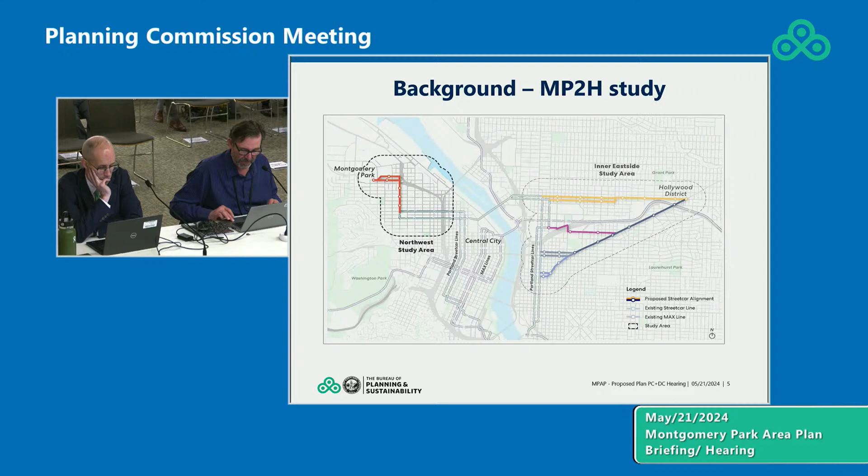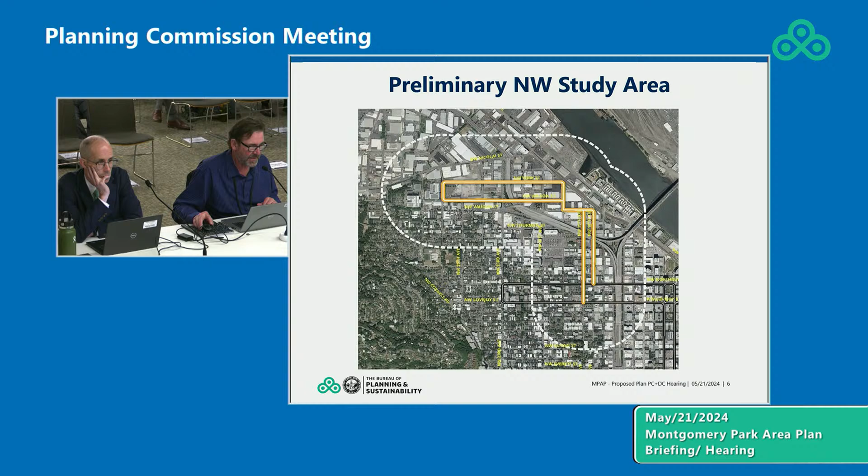The Montgomery Park to Hollywood study included a lot of high-level planning goals that centered around growth and resilience, expansion of housing and job opportunities, and urban form. I want to mention that an important aspect of the work was to engage underserved communities to advance equitable outcomes and engage those communities in doing so. We'll hear a little bit more about that as I tell you about the public involvement.

The plan is responsive and did consider a number of policy priorities and is guided by those policy considerations. They include the ones listed here on the page, but really center on investments in centers and coordinated land use and transportation investments, the need for industrial and employment lands in the city to support and provide middle-wage jobs, particularly those that don't require a four-year degree, the need for more housing, including affordable housing in high-opportunity locations, and again, an emphasis on equitable development outcomes and how to realize public benefits through the value created by public actions.

So why plan for this Northwest study area? As I mentioned, there were some opportunities. This Montgomery Park to Hollywood process emphasized work in Northwest because of the opportunity and potential presented by the large and, at this time, somewhat underutilized sites located in this high opportunity area near both the central city and the industrial jobs of Northwest Portland.

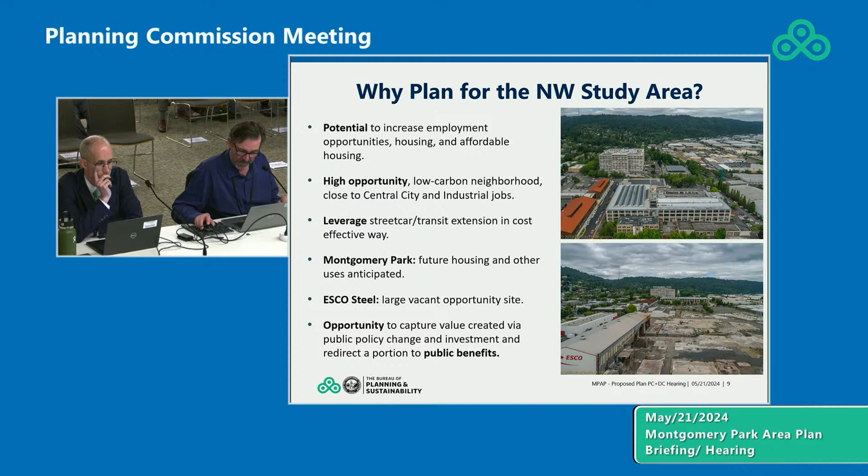We also worked with, on the east side, Hollywood Senior Center and Urban League, who partnered, as well as Micro Enterprise Solutions of Oregon, or MESO as they go by, and they again engaged their respective communities in the northeast area around Hollywood. I would note that all 4 of those organizations had seats on a project working group that Patricia mentioned earlier and participated in the study and the work that we're seeing tonight in Northwest via the working group.

We also engaged with many other neighborhood and other groups, including the Northwest District Association, Northwest Active Streets, and the Northwest Industrial Business Association. I mentioned the Northwest Project Working Group that met 7 times during the course of the project.

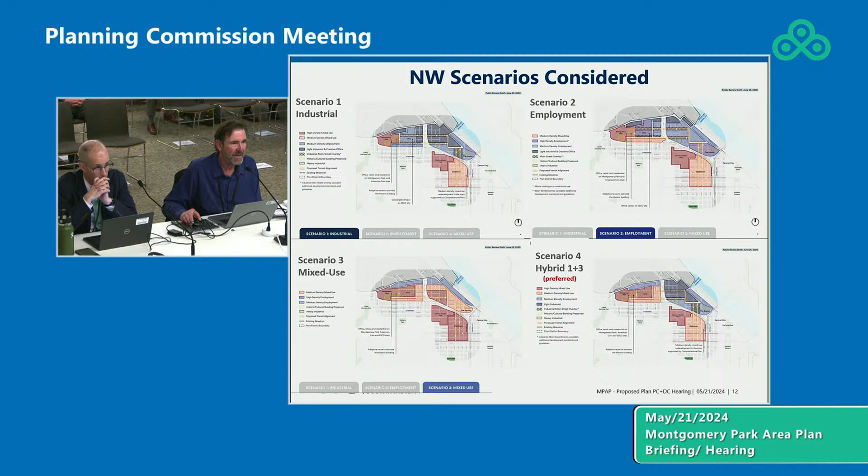It retains industrial uses east of Highway 30, in an area where the industrial uses are more built out and there is lower opportunity for change. And it proposes mixed use in the area west of Highway 30, shown in red and pink, where there is greater opportunity for change with the vacant ESCO site and the Montgomery Park site that has additional land capacity. That's resulted in this plan concept scenario here.

So what we're proposing is to create a new mixed-use neighborhood west of Highway 30, shown in red and circled in that red dashed line, served by an extension of Portland Streetcar. You can see the streetcar extending up 23rd, out Roosevelt Street, onto 26th, and back in a loop on Wilson Street. We would propose to change the land use designations in this area from industrial and employment designations to facilitate a broader mix of uses, and we'll tell you more about what use designations we're proposing in a moment.

This would create the potential for 2,000 or more new housing units, with 200 or more affordable units, but we're also proposing regulations and incentives and terms that would foster jobs in the area on a continued basis. So this will be a true mixed-use area, having both housing and job opportunities.

Important to note in the concept is that we retained an employment buffer along Northwest Nicolai Street, shown in blue there, that would not allow housing and would serve as a transition between the new mixed-use area shown in red and the existing industrial areas to the north of Nicolai, as well as the areas to the east.

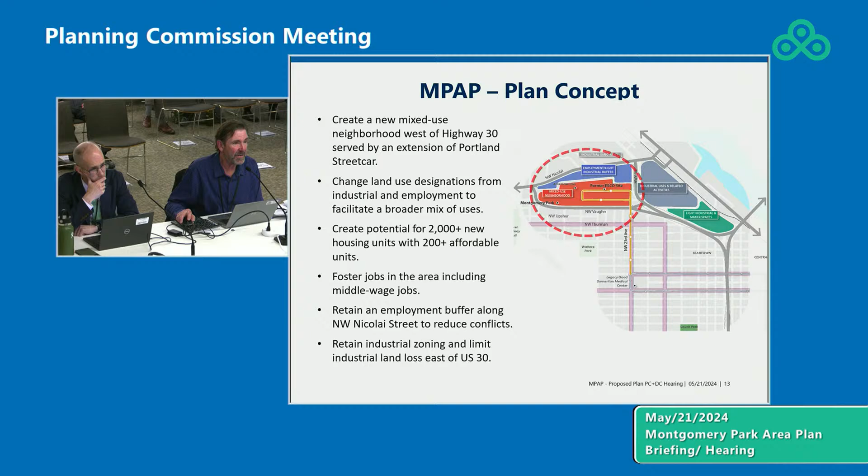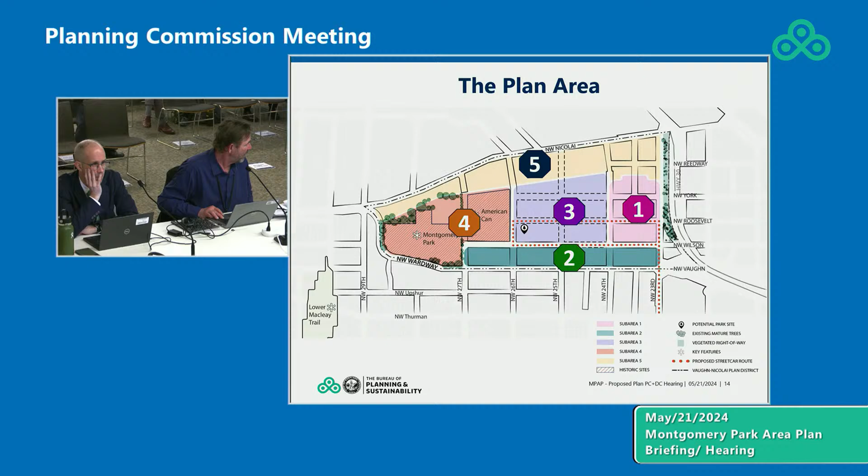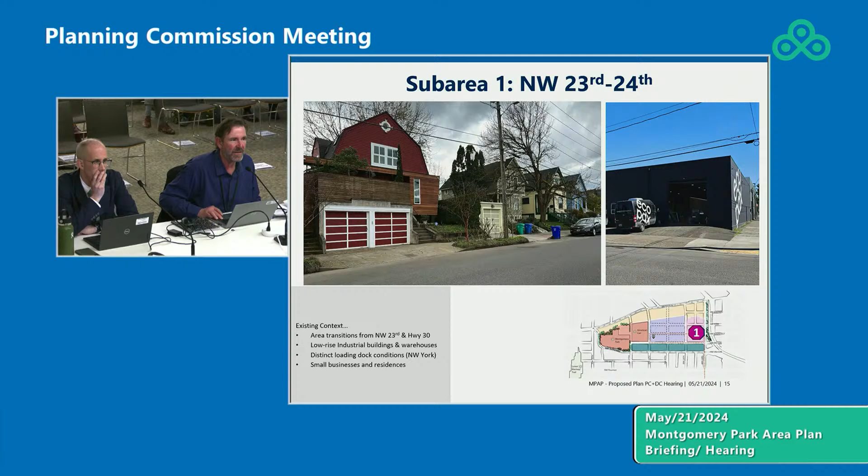So with that, I'm going to walk you through some photographs of the plan area to give you a flavor of it. We conceptualized it in 5 different sub-areas, and I'll walk you through those briefly—we'll hear more about those as we go. Starting with sub-area 1, between Northwest 23rd and 24th Avenues: it has a small lot and small block pattern generally, contains a lot of older low-rise industrial and employment uses, and about 8 single-family houses in the area, pictured here. Here are some of the employment uses located in that area.

Sub-area 2, which we consider the transition between this new area and the neighborhood to the south, lies between Northwest Vaughn and Wilson Street. It includes some traditional lower density employment and industrial uses, as well as commercial uses—there's a restaurant, some auto services, and a hotel in that area. This is the character of some of that area.

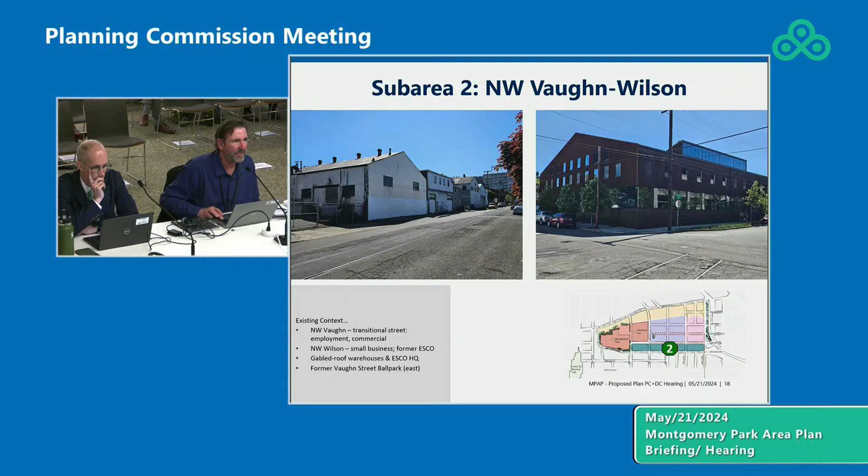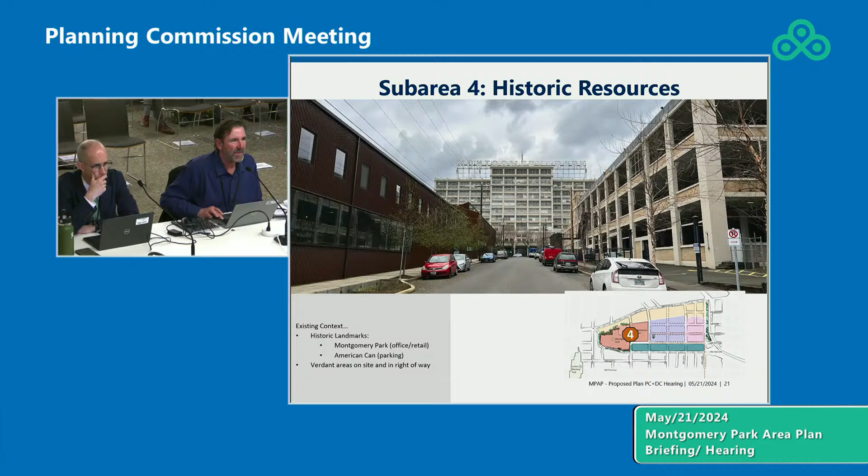This sub-area also includes some verdant and treed areas to the north that occur on a slope that act as a transition to employment areas to the north in the buffer.

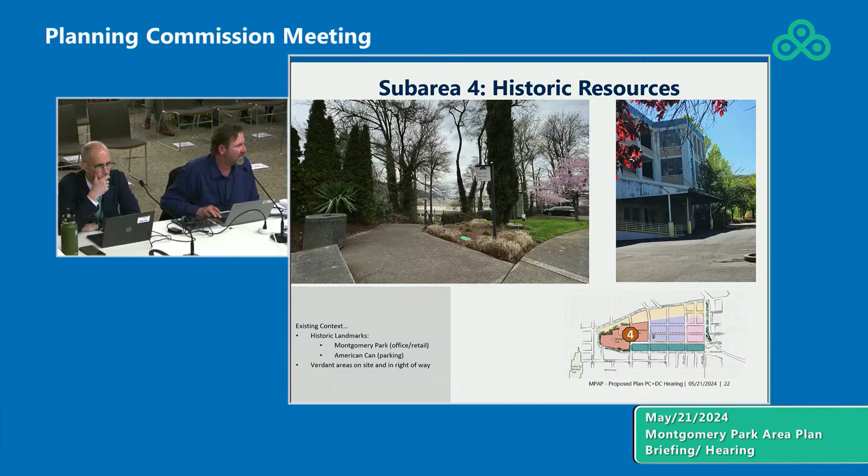And finally, the buffer area, sub-area 5, lies along Nikolai. It's shown in yellow on that map. It's in a mix of industrial and employment uses, typically large buildings, not a lot of windows, serving industrial and employment uses in that area.

So with that, I'm going to turn it over to Ryan. We'll talk a little bit more about the elements.

Thanks, Barry. So now that Barry has walked you through what is happening in the area today, here is an image of what we might expect to happen under the current regulations: larger floor-plate industrial and employment uses in lower scale buildings.

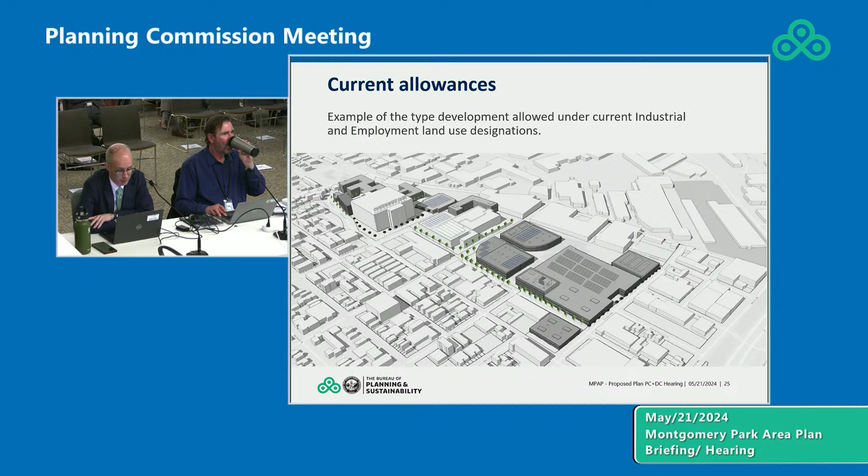This type of development is fine, it's good. It meets some of our employment goals. However...

Under the proposed plan, we would expect to see taller, denser development with a mix of uses, including residential, office, and employment uses, with open space and active transportation infrastructure, all served by a streetcar extension. Such development, we believe, would contribute to a wider array of comprehensive planning goals and policies.

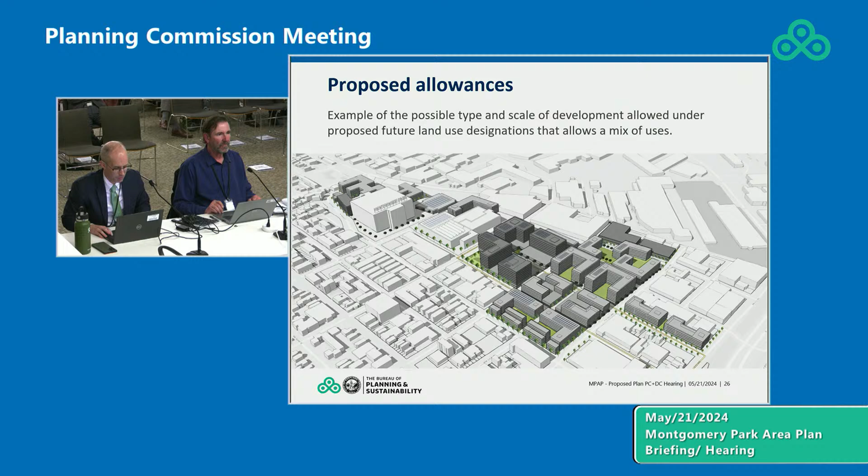Before we jump into the objectives and approaches, I want to discuss the racial equity analysis and equitable development report that were done as part of the planning for this area. I believe they're all in the appendix, right?

Yep. The reports found that the Northwest Study Area, the area surrounding the Montgomery Park area plan, is a high opportunity area, and that the relative risk of displacement in the area is lower than the city as a whole.

The reports recommended a value capture strategy to support equitable development, and also noted that the strong housing demand in the area means that development is more likely to occur, so we're more likely to meet our goals.

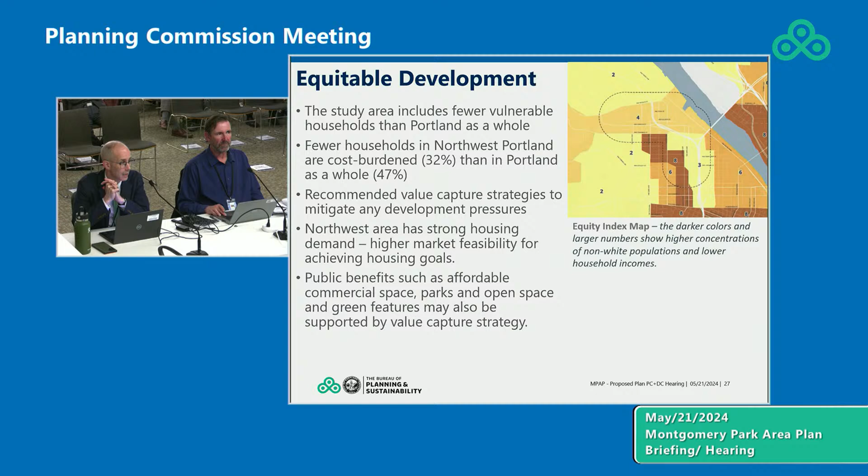The Montgomery Park area plan, this is a high opportunity area, as I said, with a plan to improve the transportation network and extend transit.

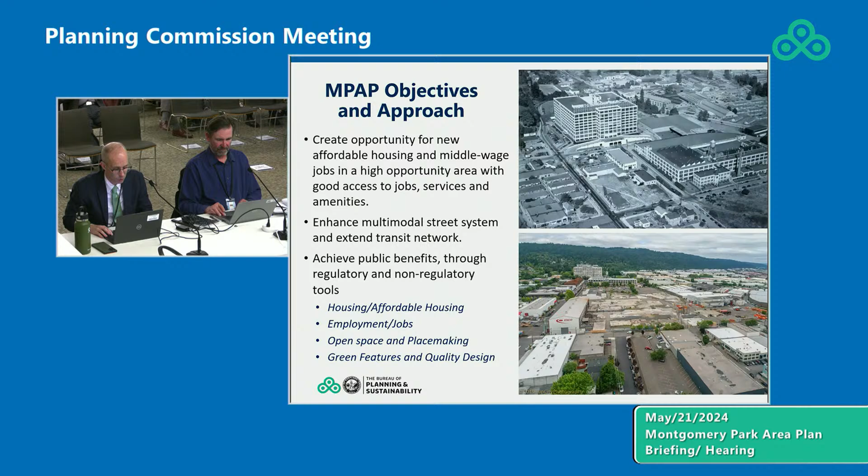The land use objectives of the Montgomery Park area plan are to advance the city's housing goals, specifically regarding affordable housing, to advance the city's employment and access to opportunity goals, to create open space or park along with placemaking elements, and to advance the city's environmental goals, all while achieving quality design.

So, we're not asking for too much.

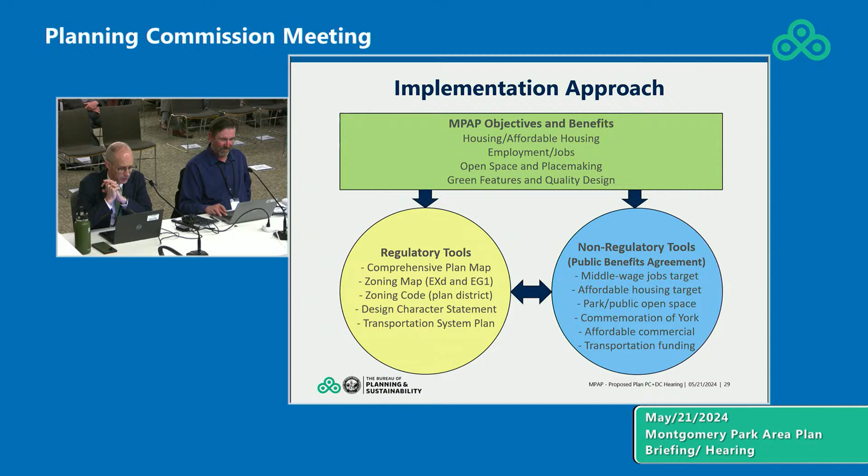The approach consists of two toolboxes: a suite of regulatory tools, shown in yellow, and a public benefits agreement, shown in blue. These tools are specifically designed to work together to achieve our equity and environmental goals.

First, I'm going to talk a little bit about housing, but I also want to note these slides are not intended for you to read in great detail. They will be available to the commission so you can go back and look at them.

But the objectives are there, and the table is intended to illustrate the way that the zoning code would work with the public benefits agreement.

I want to remind the commissions that the citywide inclusionary housing program works with the market to provide income-restricted housing where it would not otherwise occur. It is a carefully calibrated program that is just one way to produce affordable income-restricted units.

In Montgomery Park, the proposal would leverage this program to create upfront 200 units of affordable income-restricted housing. We want to deliver that benefit as soon as possible.

The zoning code would complement the public benefits agreement by only allowing the higher floor area if 15% of the dwelling units are affordable. So to unlock a higher amount, a bigger building essentially, they'd have to provide more affordable units.

Likewise, for jobs and employment uses, the zoning code would deploy a mix of requirements and incentives to ensure that the agreement's pledge of 800 middle wage jobs is achieved.

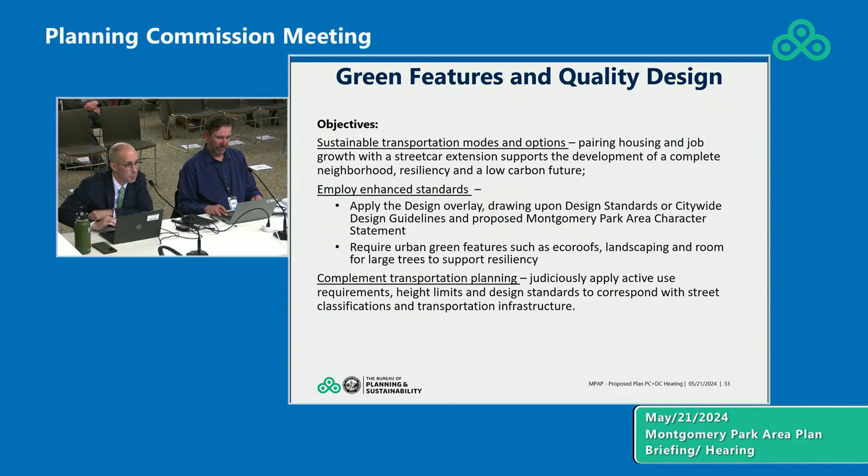On the regulatory tools, I'll give you a little roadmap to what's ahead. To dive further into the details, Cassie Ballou from the Urban Design Studio will talk about the urban design framework and character statement. Barry Manning will come back to discuss the regulatory changes, and Sean Canny from PBOT will walk you through the details on transportation.

There you go, Cassie? Thank you. I think my mic—is it on?

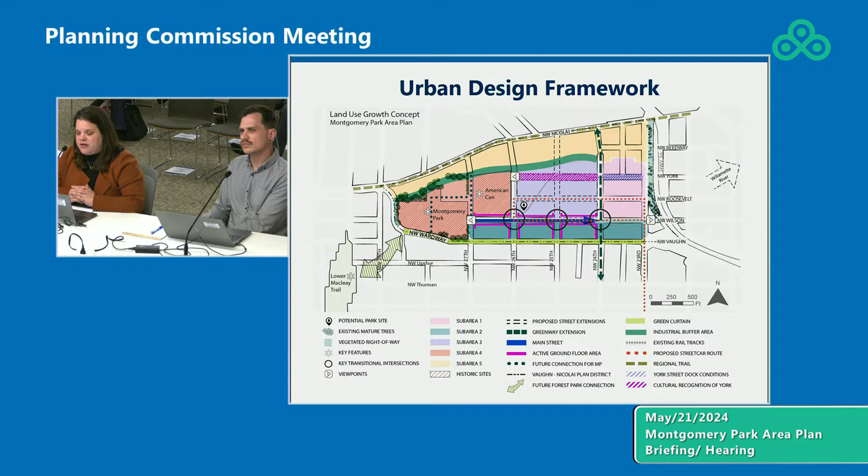Yes, okay, thanks Ryan. As you heard, the plan is home to a rich industrial and cultural history with a diverse mix of urban forms, block and lot patterns, building typologies and uses, as well as two prominent historic landmarks. The plan area's context is distinct enough that we've developed a series of sub-areas, as you heard from Barry, with concepts to build and support an urban design framework.

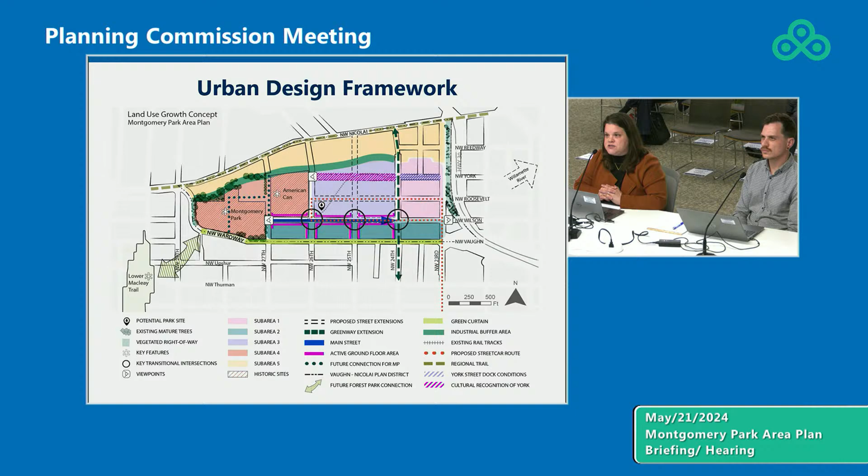This framework, illustrated in a land use growth concept diagram above, underscores how the plan's regulatory tools and policies will support the development of the entire district and address each area's unique context. This includes highlighting a new active Main Street on Northwest Wilson, and the location of some of the area's unique vistas and future connections to Forest Park. Through this, the project plan hopes to shift the conversation and change the vision for this area.

Next slide. This vision includes a few physical elements shown on this bird's eye view on screen, which illustrates a possible 20-year build-out of the planned district, including a redeveloped, active, and fully connected Northwest Wilson Street with access to newly created, publicly accessible open spaces and a new park, and development utilizing climate-responsive designs such as eco-roofs and solar panels.

The commemoration of York on Northwest York Street, reinforcement of the connection to Forest Park to create a new green curtain, replacing the former steel curtain, and the utilization of landscaping, setbacks, and careful building orientation to help offset potential impacts in this new mixed-use district.

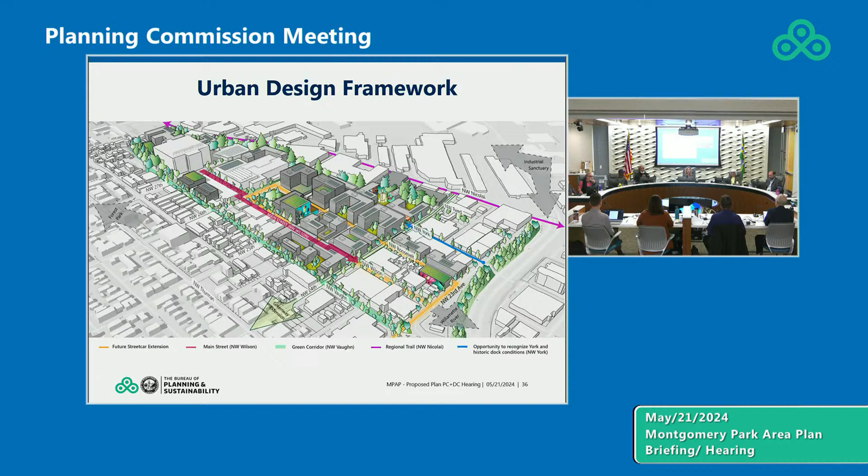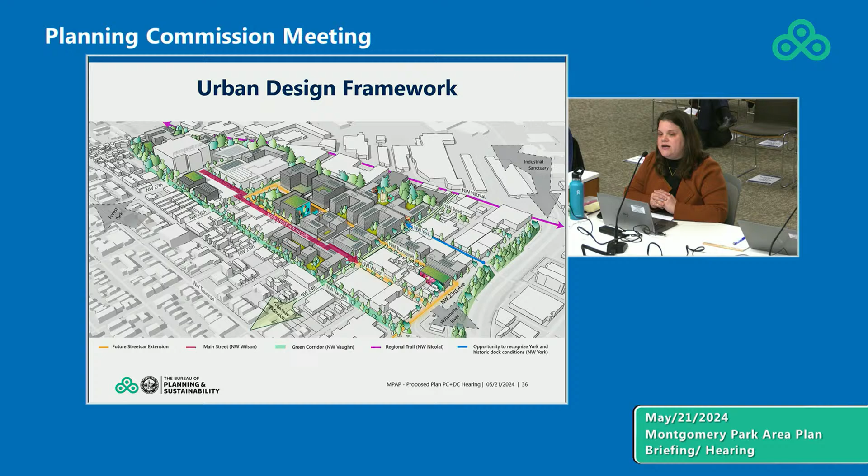The plan also includes the expansion of the design overlay, as you heard Ryan mention, to ensure that growth in the center aligns with the goals and policies set out in our 2035 comprehensive plan. As part of this expansion, the area will also receive a character statement to guide design reviews in developing the area as the community has envisioned.

Next slide. So within the plan area, the character statement will apply to the sub-areas that have the design overlay, indicated in the image in blue shade. Of those sub-areas, 1, 2, and 3 will most heavily use the character statement for projects that go through design review.

It will only apply to a small portion of sub-area 4, in areas outside the historic landmark boundaries, which are shown in pink. And although the statement will not apply to development within sub-area 5, the plan includes guidance to help mitigate impacts from this employment buffer, which still has some light industrial uses.

Final recommendations on the application and location of the design overlay will be made as part of the larger plan recommendations by the Planning Commission to City Council. However, the Design Commission will also provide their recommendation on the application of the design overlay to the Planning Commission during this process, and we can go over more of that later. Next slide.

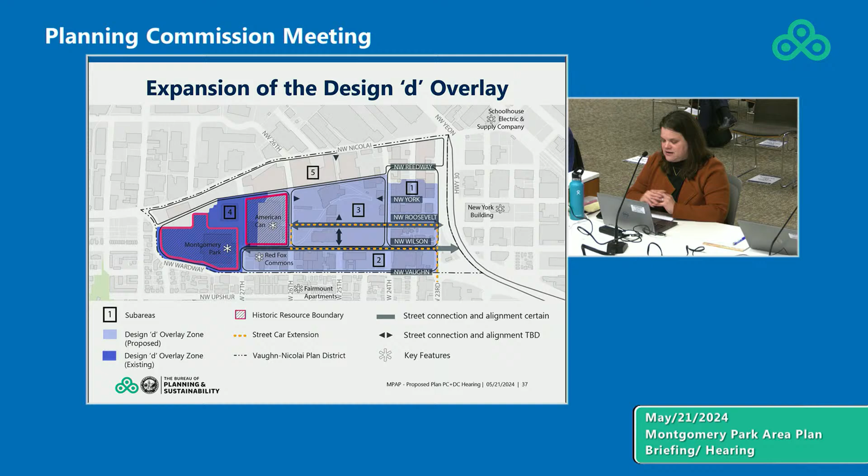The character statements are a new tool, and if adopted, this will be the third one in the city of Portland. It's a long-range tool intended to guide the development and inform the character of a place over a period of many years. Character statements apply in our centers and corridors, which have the design overlay zone.

The statements are developed in partnership with an area's local community through several points of outreach. For this one, that included the design workshop and open house in June of 2023 that Barry mentioned, a public survey in November of 2023, and a BIPOC design focus group in February of this year. Finally, the statements are adopted through a legislative process like this one, with a recommendation from the Portland Design Commission to City Council.

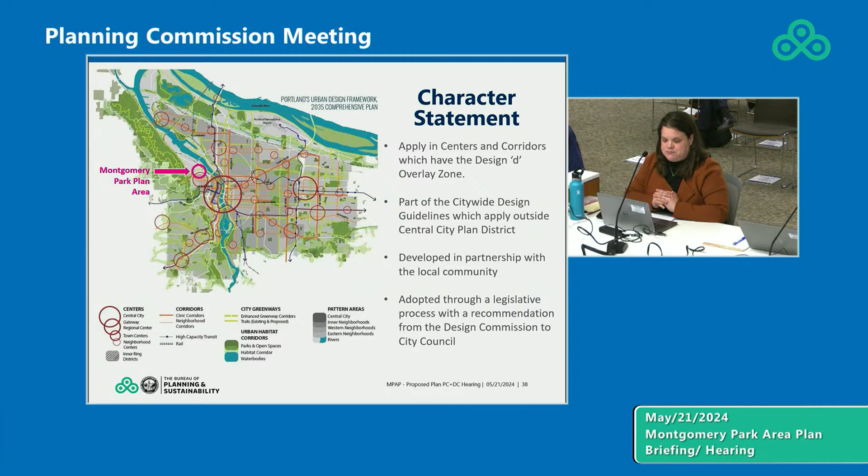Each character statement is limited to 2 pages and provides a background, a diagrammatic map, and guidance around 3 themes: community, architecture and urban design, and natural and scenic resources.

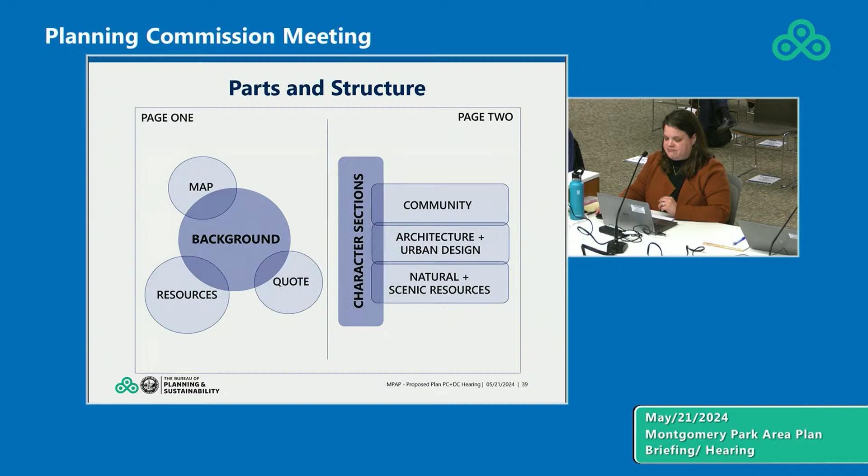The statement covers a lot of ground, but much of the guidance is centered around 3 primary issues: referencing, reusing, and preserving the area's industrial heritage; acknowledging the contributions made by previously displaced communities of color, primarily Black, Chinese, and Indigenous communities; and acknowledging and restoring, where possible, the area's natural environment and resources.

Staff also looked for opportunities to strengthen guidance within the character statement through the plan's proposed regulations and policies. This includes additional support for maintaining a landscaped buffer and setbacks at the northern border of Sub-Area 5, enforcing an active Main Street on Northwest Wilson, and incentives for more public open spaces and a new park.

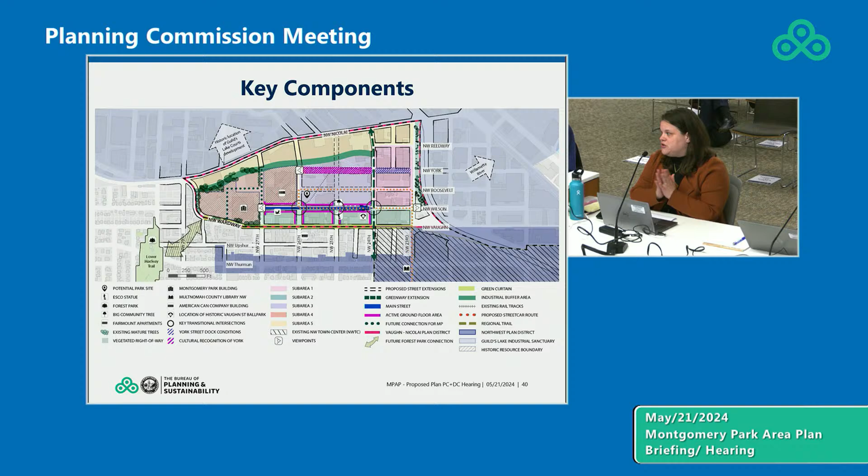And with that, I'm going to turn it over to Barry to talk more about the regulatory policies. Great, thanks, Cassie.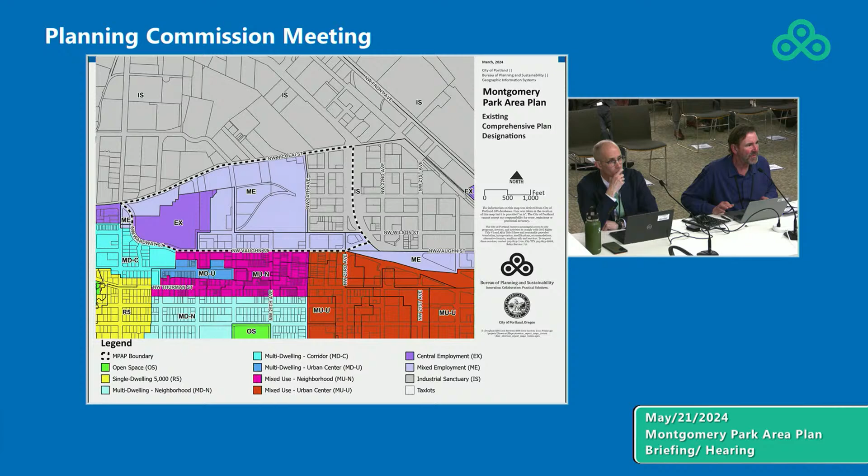I'm going to walk you through changes we're proposing to the comprehensive plan maps and comprehensive plan, as well as the zoning maps and some zoning code highlights we're using to implement the Montgomery Park area plan. What you see pictured now is the current comprehensive plan map, and the comprehensive plan, as a reminder, denotes the long-range vision for development in the area.

Currently that vision is a combination of central employment shown in the bright purple, with the EX designation. I wish I had a pointer. Boy, where did those go? But if I had a pointer, I'd be pointing at the EX area in dark purple. That's the Montgomery Park site. To the right of that is the lighter purple ME labeled area.

That is the area Patricia referenced early on in this presentation that was designated in the 2035 comp plan as mixed employment, the area where we're expected to see a change and transition from heavier industrial uses to offices and more intense uses. To the right of that, you see the small block pattern between 23rd and 24th Avenues that is currently zoned General Industrial 1.

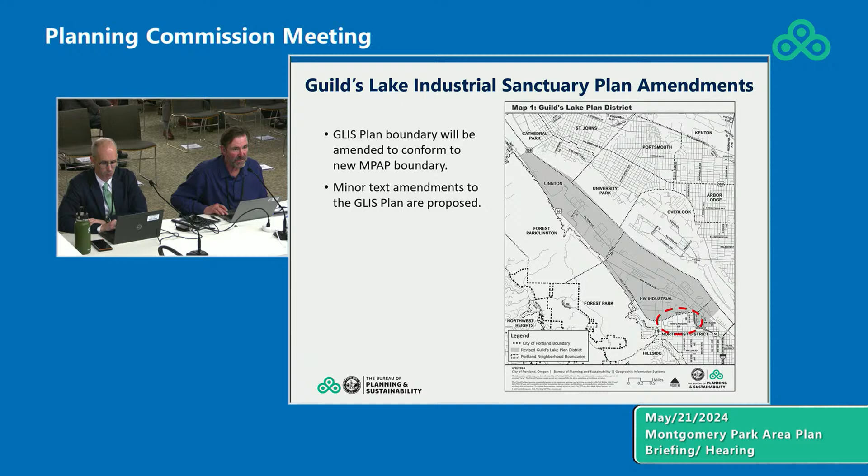We are proposing, as I mentioned earlier, to reconcile a couple of existing area plans. The Guild's Lake Industrial Sanctuary Plan overlaps in this area, and we're proposing to amend the boundary of that plan to remove the Montgomery Park Plan area from the Guild's Lake Industrial Sanctuary Plan area. We also are proposing some minor text amendments that are in Volume 4.

Similarly, to the south is the Northwest District Plan, which also has a slight overlap with this area. We're proposing again to amend the Northwest District Plan maps and some minor text amendments to remove the Montgomery Park Area Plan area from the Northwest District Plan, to reconcile them so that there's not confusion about which set of regulations or rules apply in these areas.

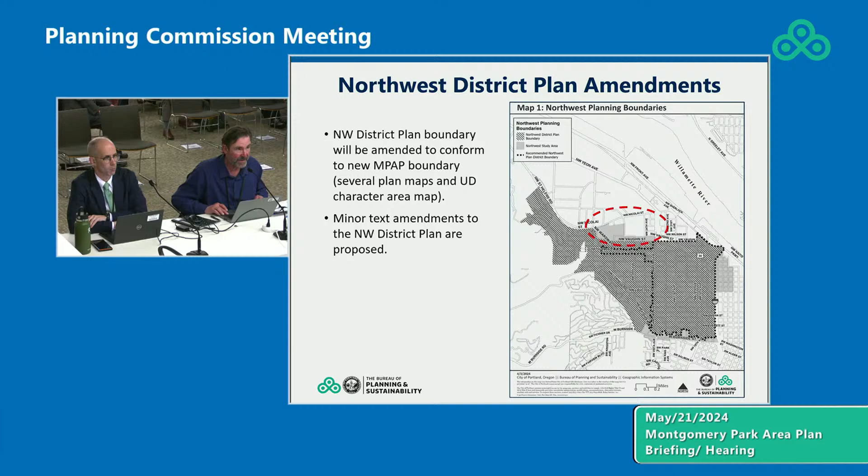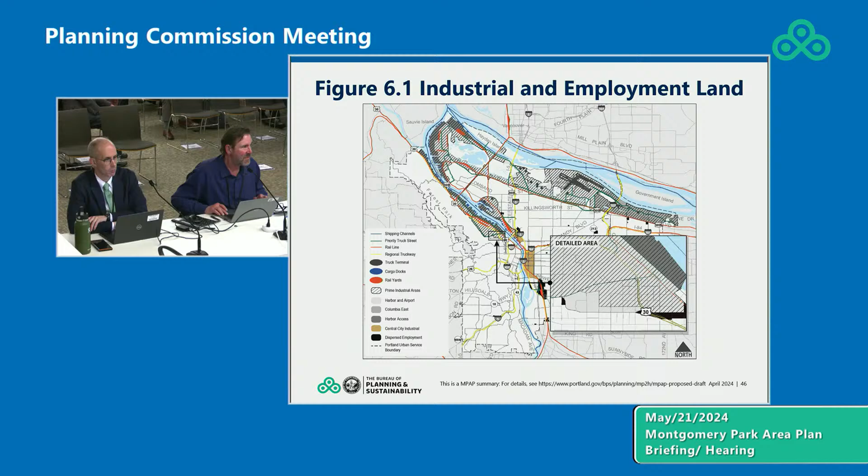This is the existing figure 6.1, which shows industrial and employment lands throughout the city, and the inset map shows the application of the designations in this particular area. It's a combination of prime industrial overlay areas and some employment overlays, and as part of the proposal, we are suggesting that we remove the prime industrial overlay and the employment overlay, although some of the areas may still qualify as employment areas that would belong on this map.

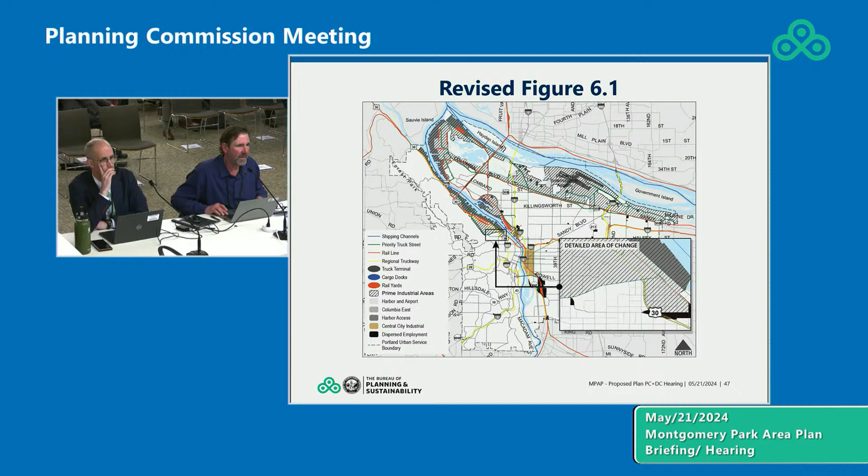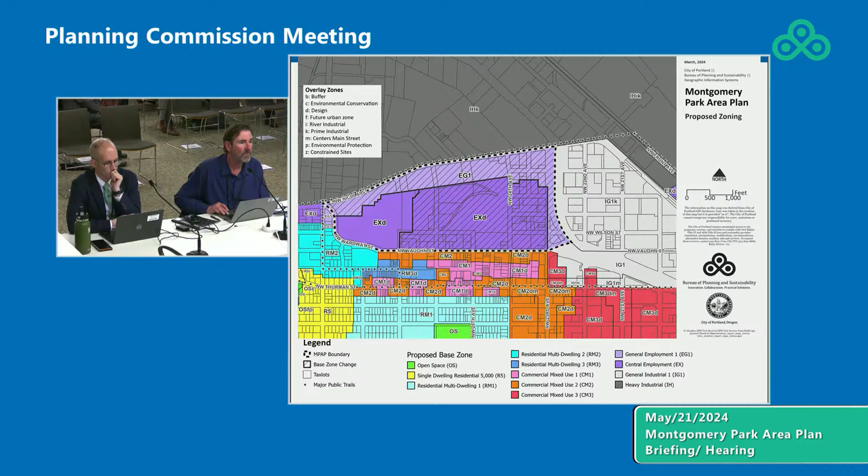Along with the zoning map changes, we're proposing, as I mentioned earlier, a new plan district tool in the zoning code that would further regulate development in order to evoke transit-oriented development in this area and the intensity that Ryan showed you and Cassie showed you in some of those diagrams.

Some of the key features of this new plan district include bonuses for height and floor area, non-residential floor area or space requirements, active use areas on the main street, affordable commercial space, urban green features, and others. We can talk more in detail about those as we move forward.

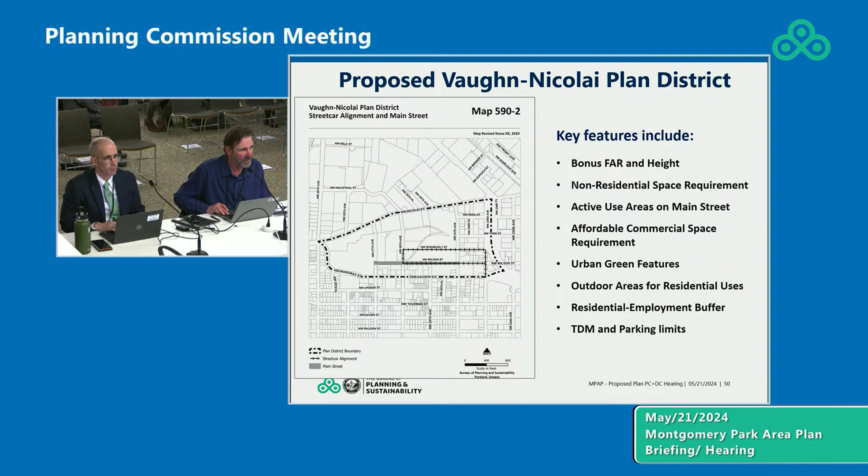The floor area and height bonuses are related to inclusionary housing, evoking additional affordable housing or a higher percentage of affordable units, and employment opportunity. I would note one more thing, a detail we can talk about later, that in areas C and D, those floor area ratios are linked to the public benefits agreement fairly directly in the provision of early affordable housing units.

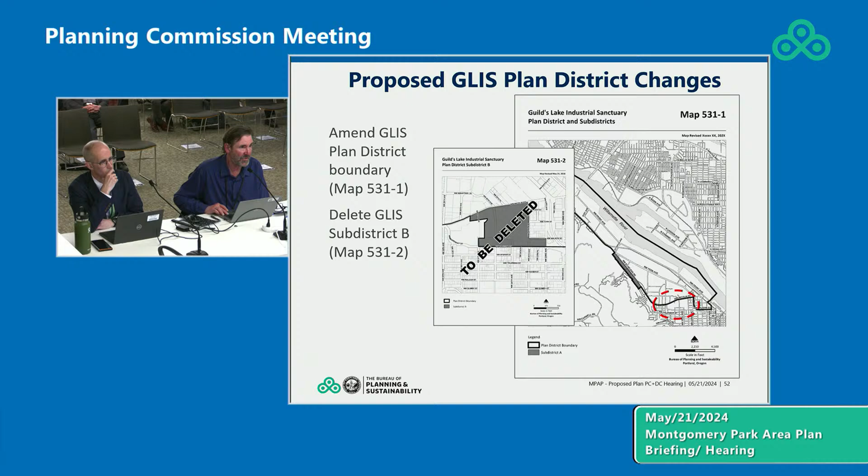We are proposing, similar to the plan amendments, some amendments to the plan districts. We're proposing to remove this area from the Guild's Lake Industrial Sanctuary Plan District. And similarly in Northwest, which has a plan district, we're proposing to apply streetcar-oriented development regulations along Northwest 23rd, where this new streetcar extension would occur. That complements the existing regulations that apply in the dashed area on Northrup and Lovejoy.

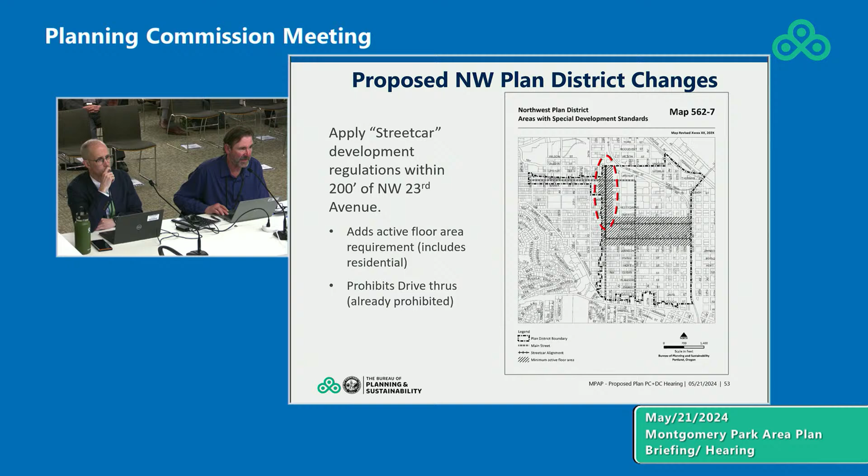Good evening, Commissioners. My name is Sean Canny. I'm a transportation planner at the Portland Bureau of Transportation. Also present this evening are Mauricio Leclerc, supervising planner of the area and project planning team at PBOT, and Dan Bower, who is executive director of Portland Streetcar.

The proposed draft of the Montgomery Park Area Transportation Plan, which is Volume 3 of the Montgomery Park Area Plan, includes recommendations for multimodal transportation projects centered around the proposed streetcar extension to Montgomery Park, as well as based on adopted plans, existing policy, public engagement, and analysis. It also recommends policy updates to the Transportation System Plan, or TSP, and overviews recommended implementation strategies.

In addition to the community engagement described earlier, PBOT conducted another round of community engagement, mostly during 2023, focused on the proposed streetcar extension. We worked to reintroduce the project and get input on the community's needs and priorities, as well as to gather additional feedback on other proposals in the plan. We focused much of our canvassing and intercept surveys near existing regulated affordable housing near streetcar in Northwest Portland, as well as at existing transit stops near the proposed alignment.

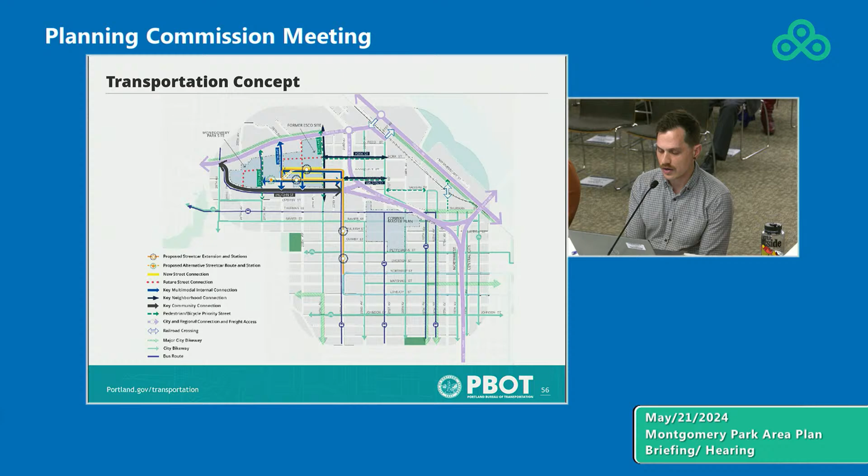The recommendations in the plan are organized around connections. This map represents the transportation concept for the area, which considers multimodal connections at various scales.

More specifically, the plan includes project recommendations at 3 different scales: those internal to the Montgomery Park area itself, those that stitch the area together with the rest of the Northwest District neighborhood, and those that facilitate movement to and from the broader citywide and regional transportation network. The centerpiece recommended project, referred to in the plan as the Big Move, is a proposed streetcar extension, as it improves connections at all 3 of those scales.

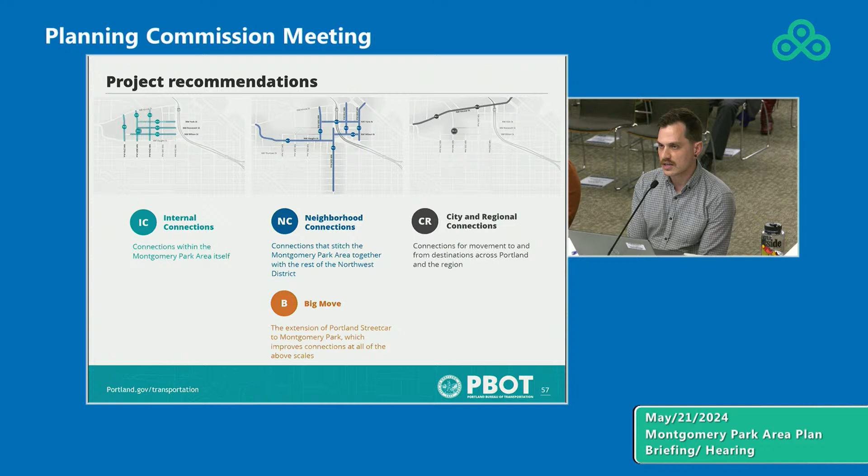The proposed streetcar extension itself connects the existing streetcar system to Montgomery Park. It is planned to be 100% off-wire using proven hybrid battery technology, significantly reducing construction and ongoing maintenance costs and minimizing impacts in the project area. I'll also note that Portland Streetcar's original fleet of vehicles are about 25 years old and reaching their end of useful life, and procurement of up to 15 new off-wire capable streetcars is already planned due to this need.

The project would also include new multimodal streets, including extensions of Northwest Roosevelt Street, Northwest Wilson Street, and Northwest 25th Avenue—shown on this map as the green rectangles—as well as complete rehabilitation of Northwest 23rd Avenue from Northwest Lovejoy to Northwest Vaughn, including stormwater, utility, and accessibility upgrades. The community has called for improvements to 23rd Avenue for years.

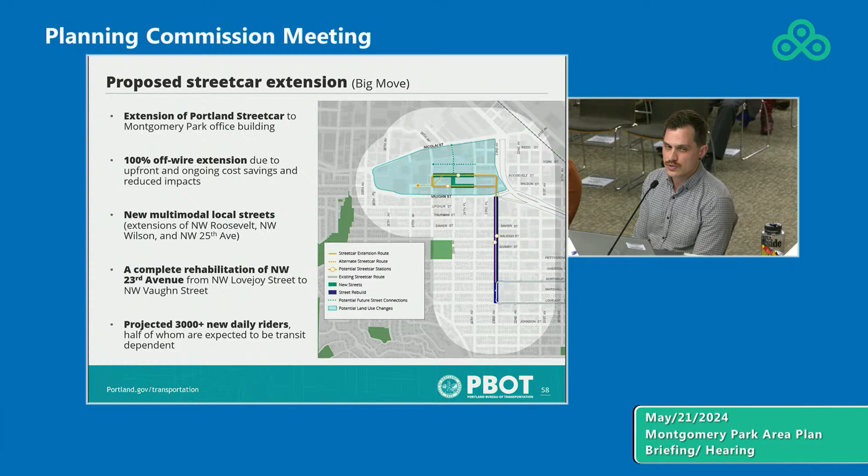The extension is projected to support 3,000 or more new daily riders, half of whom are expected to be transit dependent. To get more specific, the preferred transit alternative is a 0.65 one-way route mile extension of

the existing Portland Streetcar North-South, or NS line, from its existing terminus at Northwest 23rd Avenue and Northwest Northrup Street, along Northwest 23rd Avenue to a parallel one-way couplet with westbound movement on Northwest Roosevelt Street and eastbound movement on Northwest Wilson Street.

Station locations have also been identified, though they would be finalized as part of the planned upcoming formal project development process, which will include more community engagement.

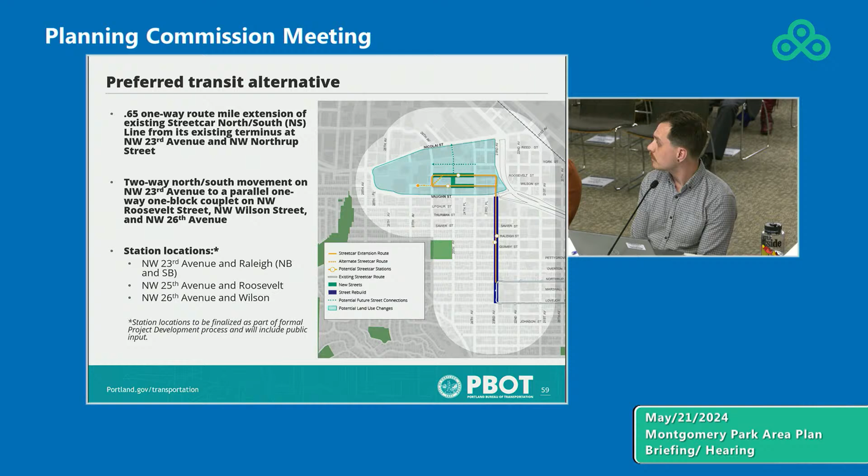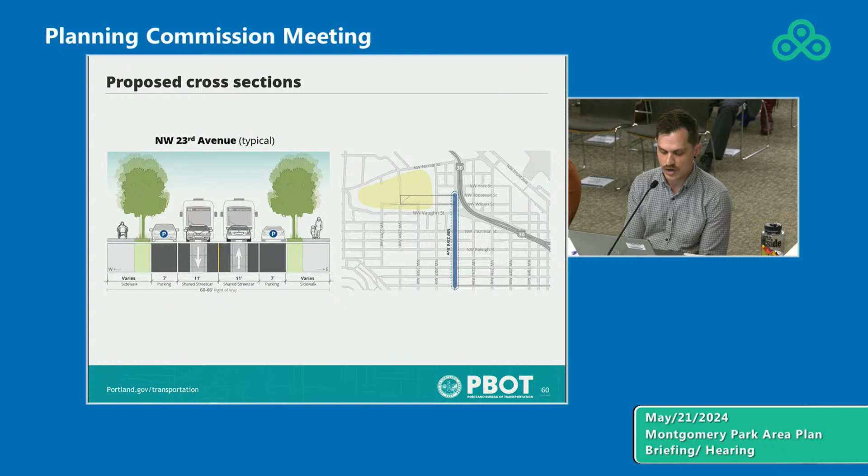Here is the proposed typical cross-section of Northwest 23rd Avenue. The streetcar would operate both northbound and southbound in shared general purpose travel lanes, and parking would be maintained on both sides of the street.

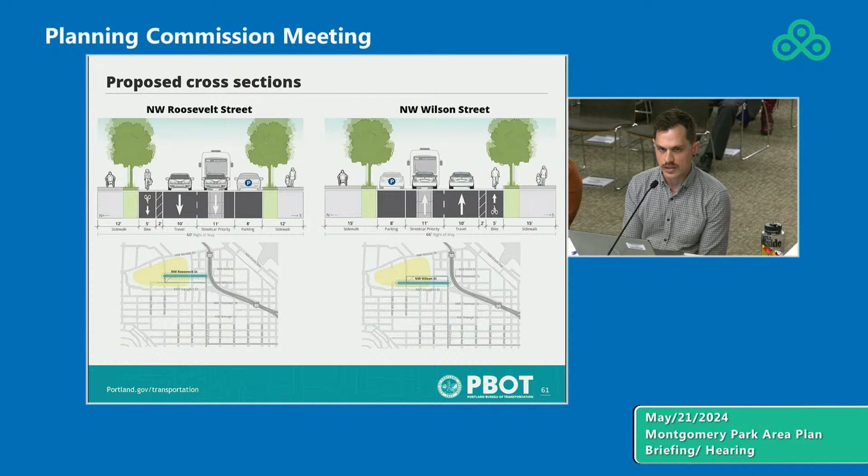During the planning process, we evaluated various transit mode alternatives for their feasibility and suitability for the final recommended land use changes for the area. Streetcar was ultimately chosen for several reasons, including being the highest capacity transit type and being the most sustainable and climate-friendly option.

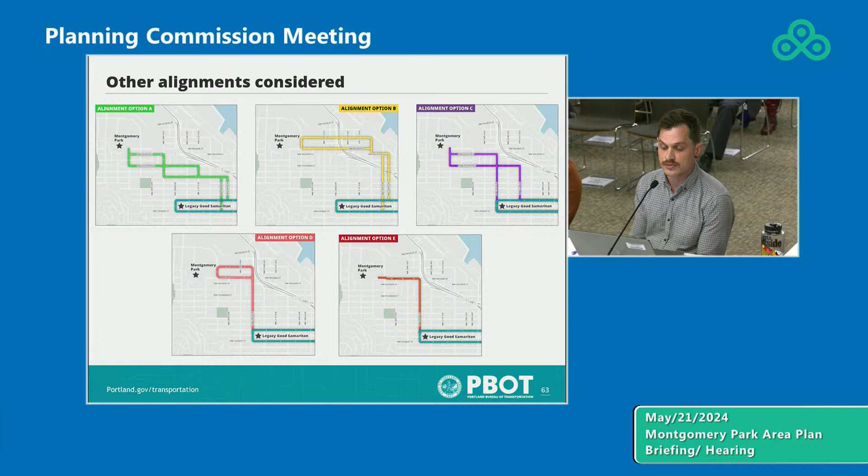We also explored various alignment options for the proposed extension. Through research, community engagement, and analysis, the final preferred transit alternative that I've described was developed and selected.

So why streetcar specifically? Streetcar has a proven track record of helping support equitable and sustainable development. Of all housing constructed since 2001 in Portland, 50% has been built within a quarter mile of an existing streetcar line. That number is 40% for all regulated affordable housing. Streetcar also draws high ridership, and Portland Streetcar is the third largest transit system in the state.

This extension to Montgomery Park also allows us to move forward previous adopted planning efforts, including the 2009 Streetcar System Concept Plan and the Comprehensive Plan Project. Streetcar also offers climate benefits as it runs on 100% renewable energy and can help us meet our mode shift and carbon emission reduction goals as the city grows.

Additionally, streetcar riders are consistently more diverse and transit dependent than Portlanders as a whole, and riders use streetcar to get to important destinations like school, work, shopping, medical appointments, and social services.

Why here? As already mentioned, the area presents the potential for thousands of new housing units and hundreds of new jobs in an area served by permanent, sustainable mass transit. The proposed investments in this area can help us address our housing crisis and meet our climate goals, reducing development pressures and related infrastructure costs on Portland's edges, and helping ease pressures in other gentrifying areas of the city.

Streetcar also supports dense, walkable, and rollable development connecting to critical destinations, and as I've said previously, half of the projected riders of this proposed extension are expected to rely on transit to get where they need to go.

Additionally, this opportunity would allow us to leverage a federal transit investment to address the disrepair of Northwest 23rd Avenue, tapping into that funding source for a severe need that we otherwise do not have sufficient resources to address. We have and will continue to make robust investments elsewhere, especially in underserved areas.

The map on this slide shows completed and funded projects in East Portland between 2012 and 2025, with hundreds of millions of dollars focused in that area. We're currently working on the largest capital investment in PBOT's history on 82nd Avenue, and we continue to and will continue to make safety improvements and improve multimodal connections in East Portland and other areas of high need.

We're also working to minimize the use of city discretionary funding on this project by seeking dedicated localized funding sources and federal grant funding to pay for as much of this project as possible, so we avoid using funding that could be used elsewhere in the city.

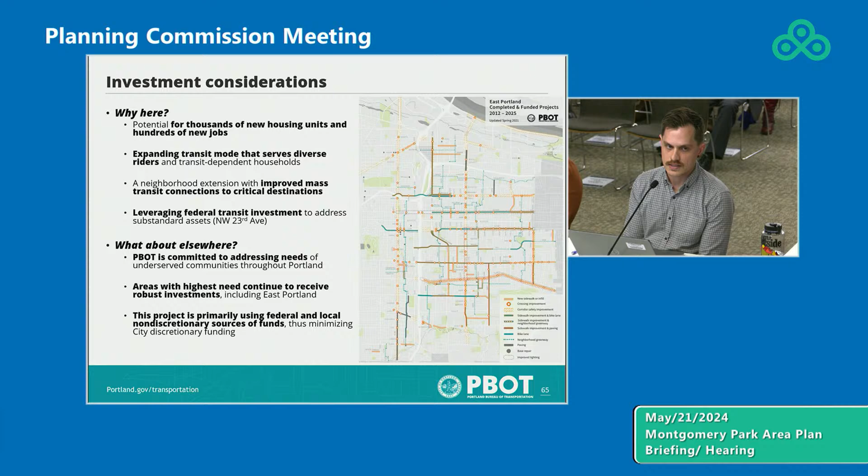Current planning level estimates indicate a rough project cost of around $120 million today, inclusive of all streetcar elements, new streets and street elements, and the rehabilitation of Northwest 23rd Avenue.

That estimate, as well as those potential funding sources, would be finalized during the future stage of project development, which is a necessary and required stage with the Federal Transit Administration that we must complete prior to applying for federal grant funding. Those funding sources would likely include a 50% federal share, as well as various local sources.

I'll note too, as we move forward toward a funding strategy, that there would be opportunities for community and stakeholder input, especially around the formation and structure of a local improvement district.

We also want to provide some clarity as to where we're going with the streetcar extension. We're currently in this deliberation stage while we're here, of course, with the Montgomery Park area plan, and are planning to finalize the preferred transit alternative that I've described as the locally preferred alternative for consideration at City Council.

We're also planning to seek entry into project development with the FTA contingent on the adoption of this plan, after which we'll finalize that funding strategy, complete environmental review, and refine design and engineering.

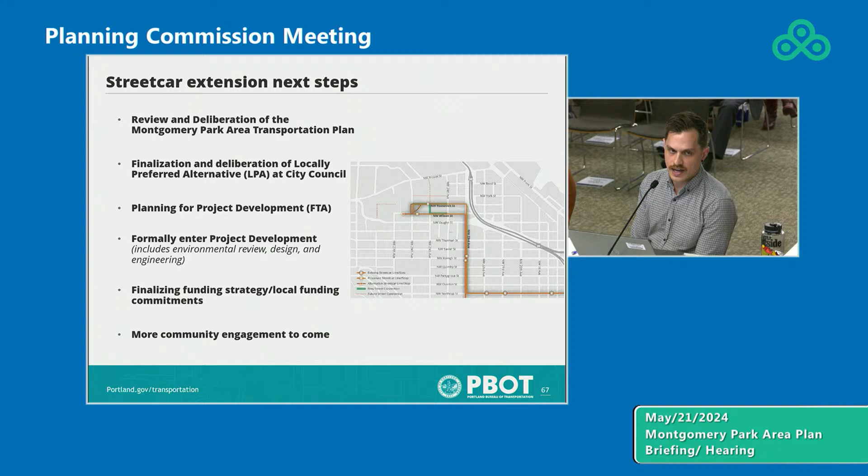The plan also recommends updates to the TSP street classifications for all modes, as well as for street design in and near the Montgomery Park area.

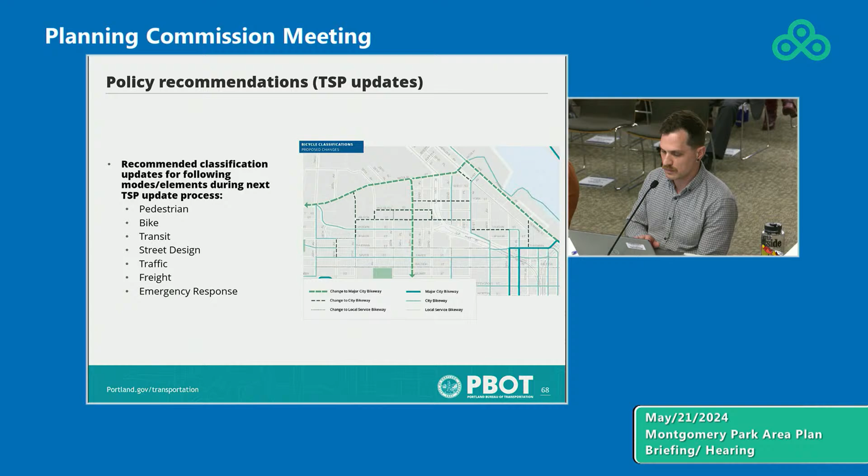The plan also recommends the development and adoption of a master street plan for the Montgomery Park area as a part of the next TSP update. Recommendations seek to ensure future street connections as the area grows, while offering flexibility for phased development in the area over time.

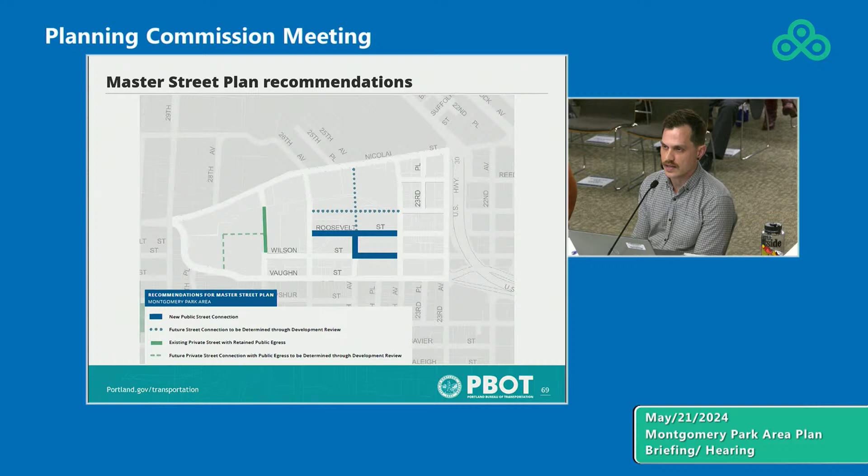The plan also overviews recommended implementation strategies, including using the Von Nicolai Plan District described earlier to regulate parking ratios and off-street parking, the development of a parking management strategy for the area, and transportation demand management programs triggered as development occurs. It also includes exploration of pilot projects to reduce drive-alone trips as demand grows, as well as pursuing federal and dedicated local funding sources to help pay for the streetcar extension and related improvements.

And that's all I've got. Okay, we're almost there. Thanks, Sean.

So tonight, thank you for your attention for a long presentation. We're going to wrap up here.

What we are asking Planning Commission to consider tonight is to recommend to City Council adoption of the Montgomery Park Area Plan, including Volume 1, which includes the comprehensive plan map amendments, as well as the zoning map and zoning code amendments. They're listed here.

Volume 2 includes the zoning code amendments, the new plan district, as well as some other zoning code amendments and cleanup items included in Volume 2. Volume 3, which Sean will talk about in just one moment, and Volume 4, which is to amend the maps and texts of the existing area plans.

That includes the Guild's Lake Industrial Sanctuary Plan and the Northwest District Plan, as described in Volume 4, to address the overlap areas with the Montgomery Park Area Plan. So that's the Planning Commission action recommendations.